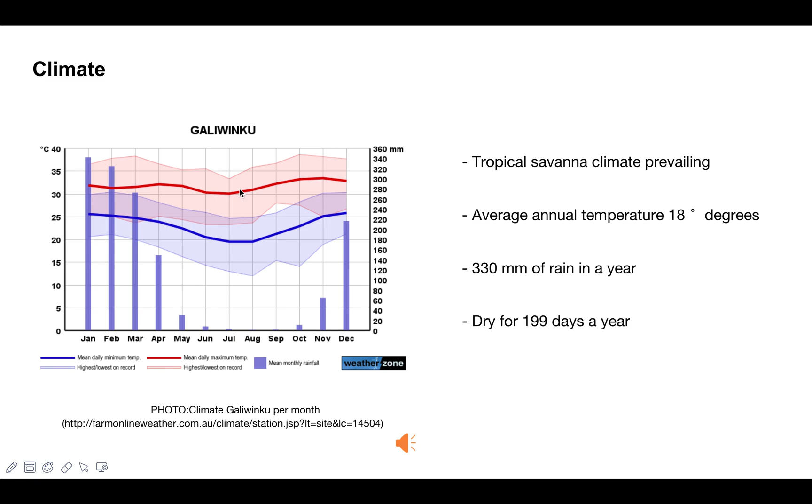According to investigations, the biggest natural disaster that this community has suffered in recent years is the hurricane from Cyclone Lam in 2015. Two-thirds of Galiwinku's houses and infrastructure were destroyed by the tropic cyclone that swept through the disaster. More than 250 people were displaced.

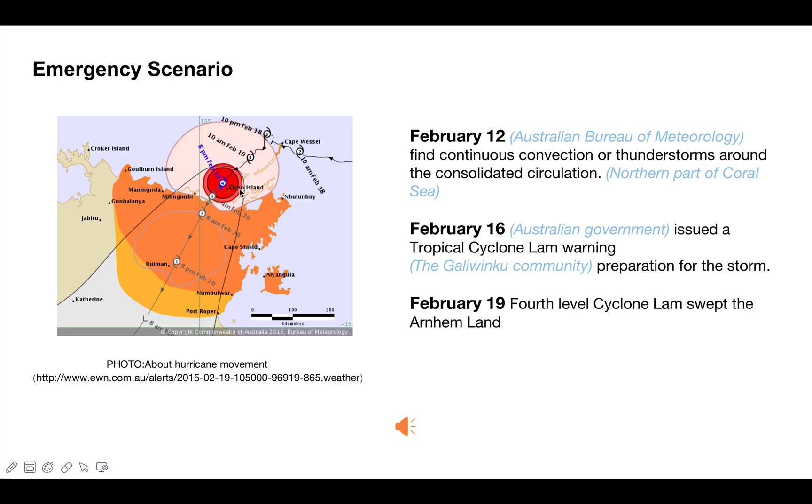Through research, I found that this disaster has brought a series of problems to people. Many residents were injured by branches and gravel during the evacuation, and people were evacuated slowly at night due to lack of light.

It's also important that residents do not have a safe place to rest while waiting for evacuation. After the disaster, it takes a long time for people to repair their house, which causes residents to live in tents for a long time. Persistent mental health problems and the spread of air and waterborne diseases also affect residents' lives.

In order to help residents solve some of the problems they need to face in emergency response, this project will design a folding temporary shelter. The main purpose of designing temporary shelters is to solve the problem of indigenous people who do not have safe shelters while waiting for rescue.

At the same time, the emergence of temporary shelters can help people reduce scratches from gravel and branches.

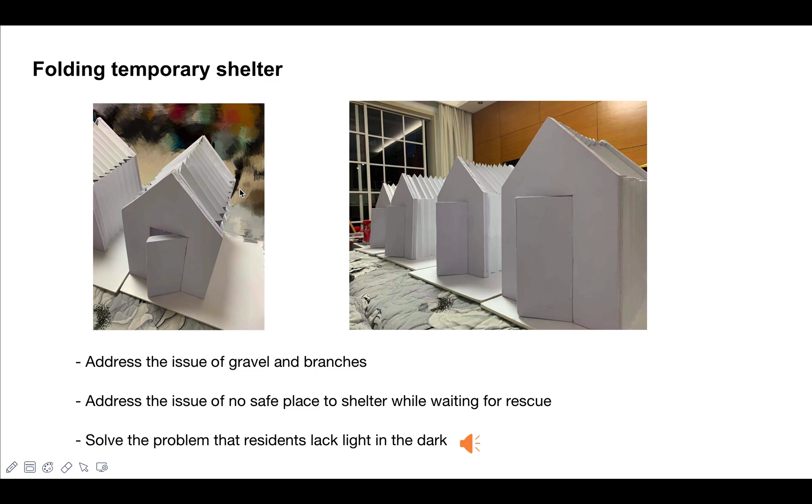Due to the occurrence of COVID-19, some materials could not be collected for this temporary shelter and used in the model. So some materials were selected to replace the materials previously prepared to complete the model establishment.

First of all, foldable materials are used as part of the walls and roof of the shelter, which will allow residents to build a temporary shelter quickly before the disaster strikes. Compared with a fixed house, a folding shelter is more flexible.

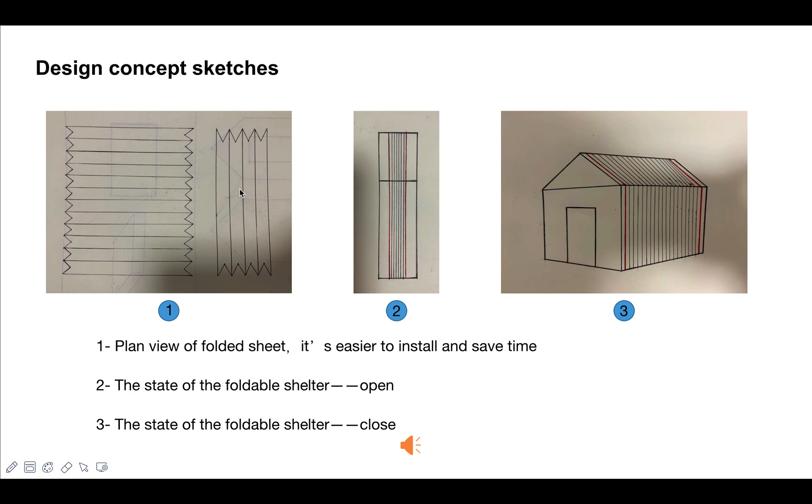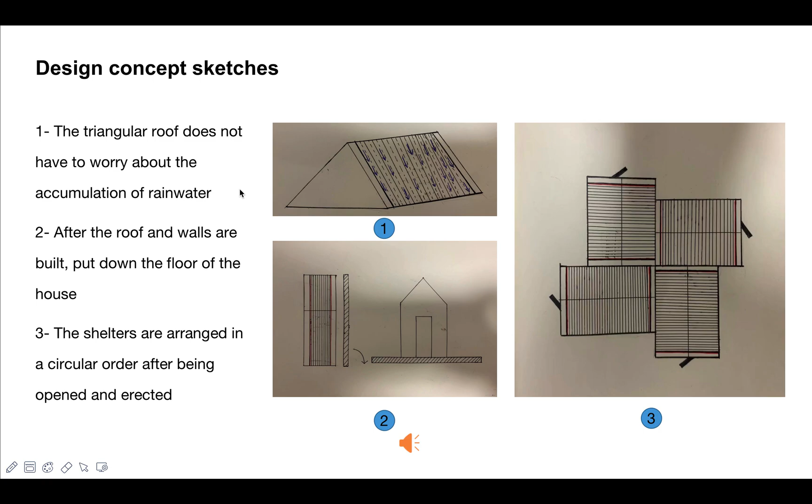Secondly, the house chooses a triangle structure, so there is no need to worry about drainage in bad weather. The accumulated water can be quickly drained along the eaves. The internal structure will also provide great help for stability of the roof.

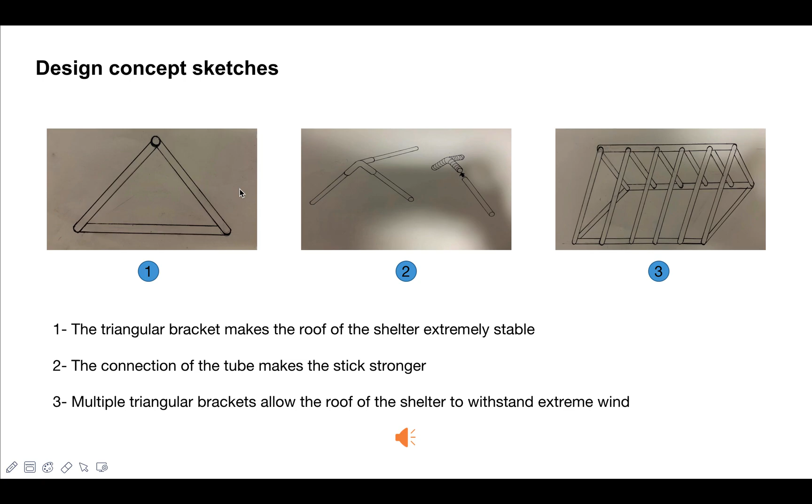The extended bed in the refuge can easily expand and contract at the same time. It can relieve the pressure on the residents to a certain extent and let the residents have their own refuge space while waiting for rescue.

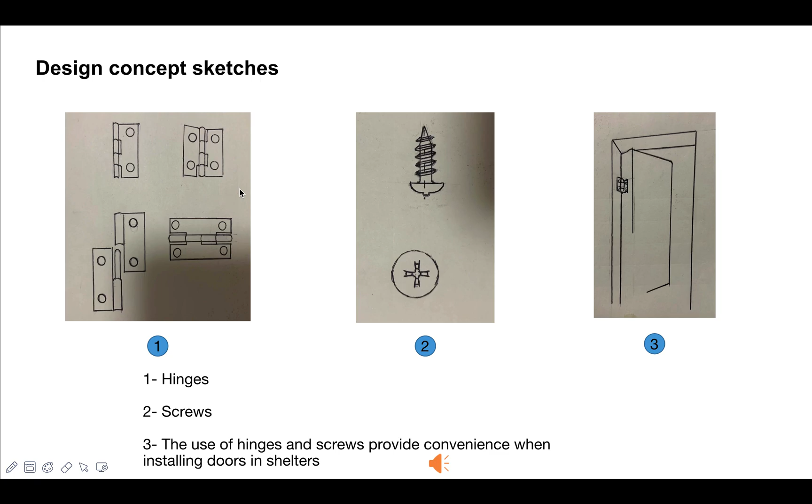The use of environmentally friendly materials is the core of the model.

In the last part of this presentation, I'm going to show the overall structure of the house to the interior design of the house.

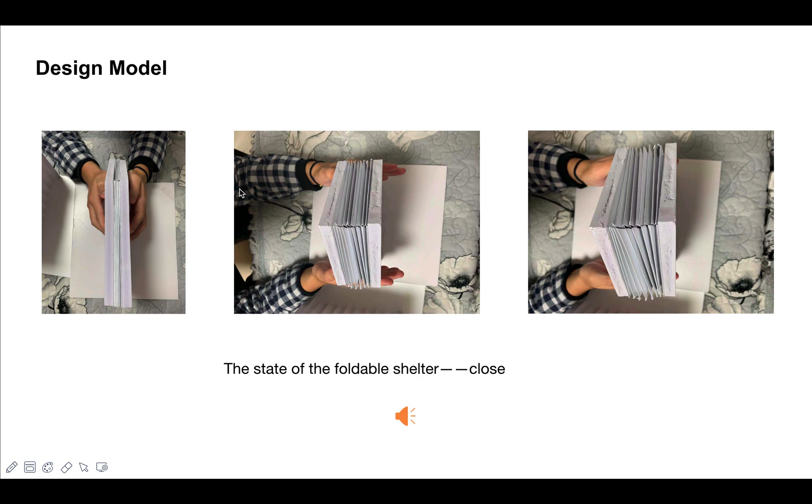The houses are placed in a specific order after being formed. Every 4 houses form a circular combination, which bears more pressure than a single house alone.

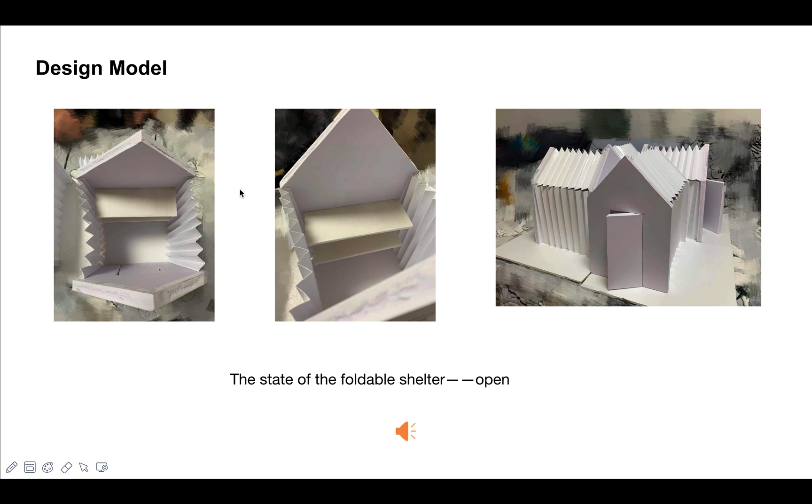The above is what I want to describe today. Thanks for watching.